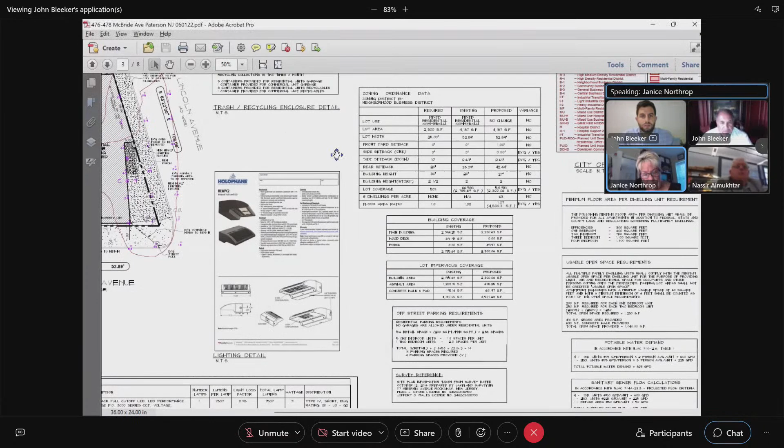May I ask you to post these plans? My son is available, Johnny can you do that? Yes, just give me one second. This way the board can see it. Can you guys see this? We can see it, except it's minuscule, so maybe enlarge it a little bit. This way people will understand what you are trying to achieve here. Are you able to see this section, does that help a bit? You enlarge it.

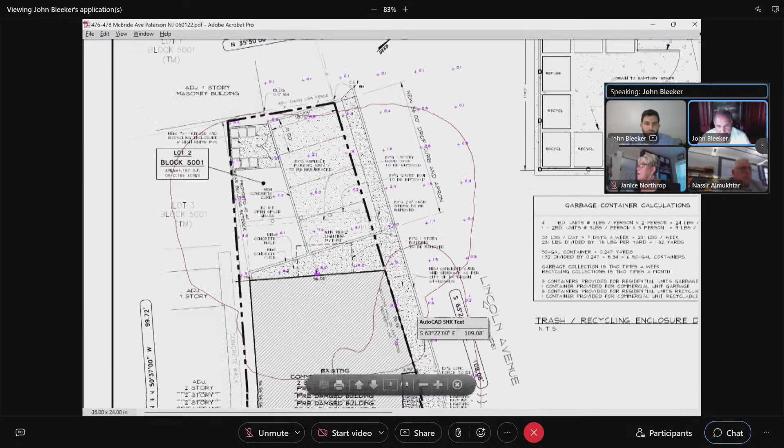There is obviously parking available on the street, since Lincoln Avenue is a dead-end street, and it only services, I think, just another 3 properties, which are restricted in use. So there is very available parking on Lincoln Avenue after hours, besides the parking that we're providing within the property itself.

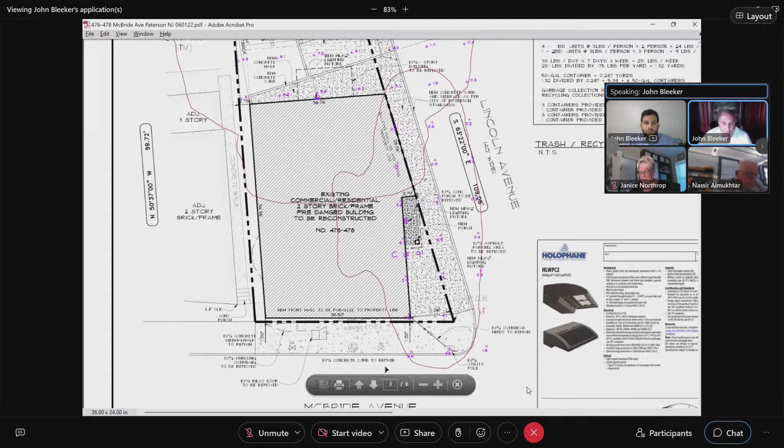If you look at the shaded area, it shows the existing building configuration as it is now. The only real significant change is what we indicated before: we're moving the front wall and reconstructing it back 1 foot. The purpose is structural and aesthetic reasons, because now we can redesign that front wall. But more importantly, we're eliminating the overhang encroachment that was there before onto the county right-of-way. That will no longer be a condition if this application is approved.

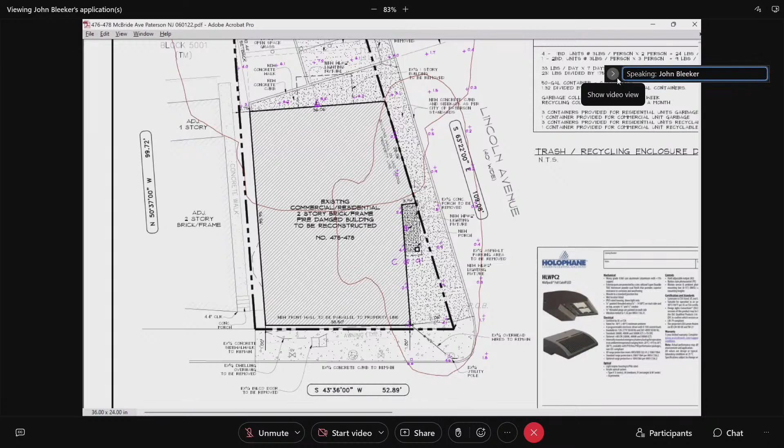Can we go to the next sheet, please? On to the next pages, I guess.

This drawing shows the drainage plan. What we're doing is taking the roof leader drainage from the existing building, piping it to seepage pits at the very rear, underneath the new parking area. That will allow us to capture the rainwater and recharge it back into the soil without causing additional drainage.

There was no real drainage facilities on the property when we went to do our visit. But we are now making a situation that didn't have any drainage into one where we're capturing the drainage from the entire property and recharging it back into the soil naturally. That's a much significant improvement to the property if the project is considered for approval.

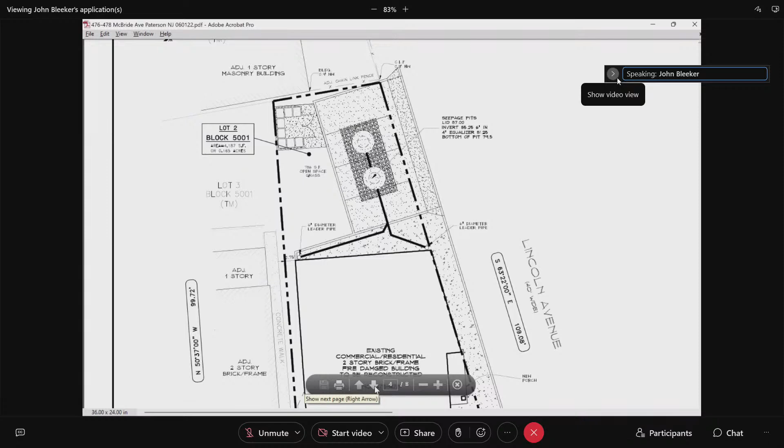Next sheet, please. This is just a soil erosion plan, necessary during the construction process. These are all the construction details on the next sheet that was just shown on the screen.

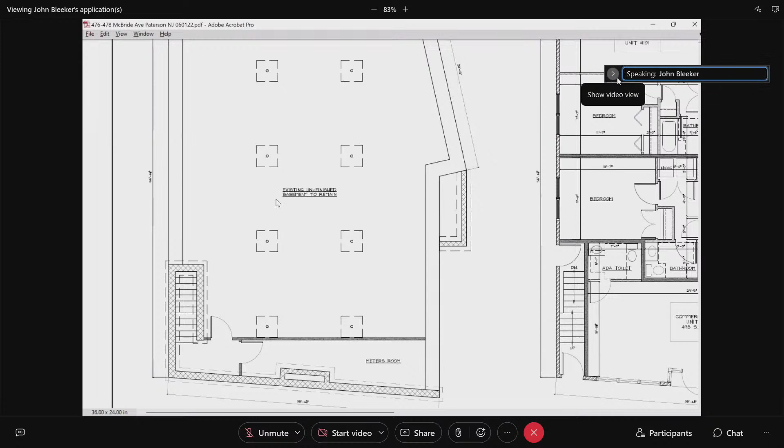Now we are at the floor plans - the existing basement floor plan is all the way to the left side of the sheet. The white areas show the existing foundation walls. If you see an area that has 2 lines in white in between, that's the existing foundation wall to remain. Anything hatched would actually be new walls that are going to be constructed.

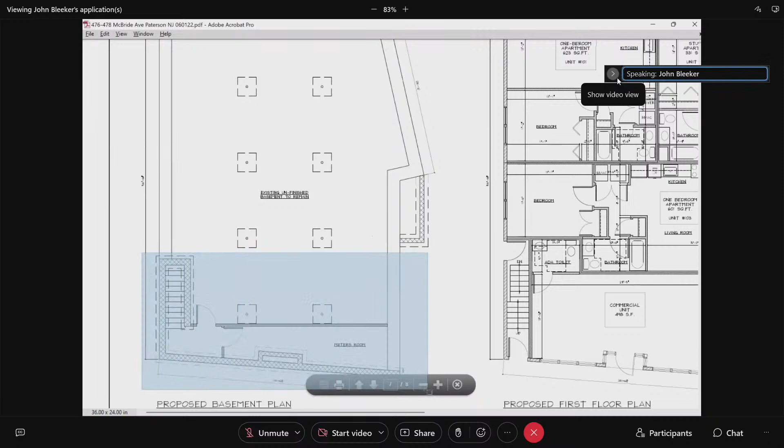Primarily you see the whole front wall, which is the same wall as the front of the building on McBride Avenue - that will all be new, as well as the wall around this new staircase that would go down. So the basement was existing; we're not doing anything additional to it. There is an area for mechanicals, for the electric meters and gas meters, that's going to stay in the front area of the basement, and the rest of the basement's going to be just open.

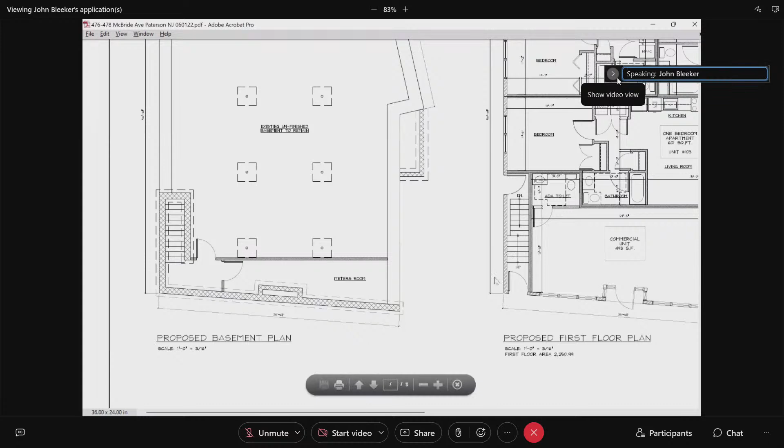The next plan is the middle of the sheet, which is the first floor plan. It shows the very front area, which is going to be the commercial space, which is significantly reduced. Originally, that commercial, the bar area and the commercial restaurant went all the way front to back of the building and occupied the whole first floor.

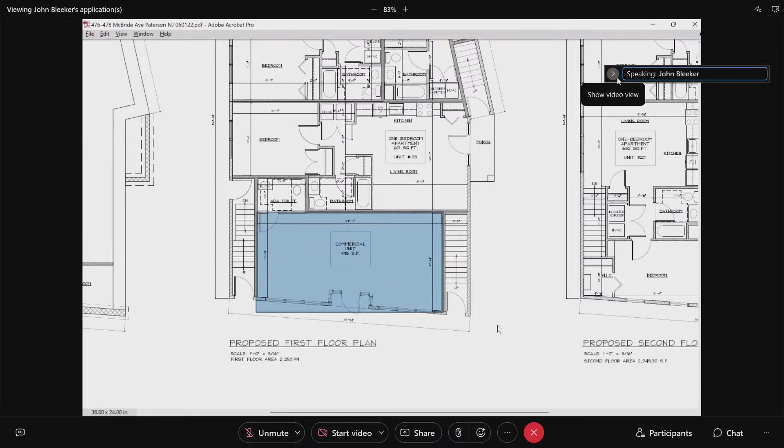Now we're only asking the board's consideration for about 490 square feet of commercial space. And then we are asking for 3 residential units, which would be contained behind that space. Each one of those units will be fully upgraded to current housing standards, including ADA access, because all those units would be at grade. So the bathroom facility would be large enough for handicap adaptable.

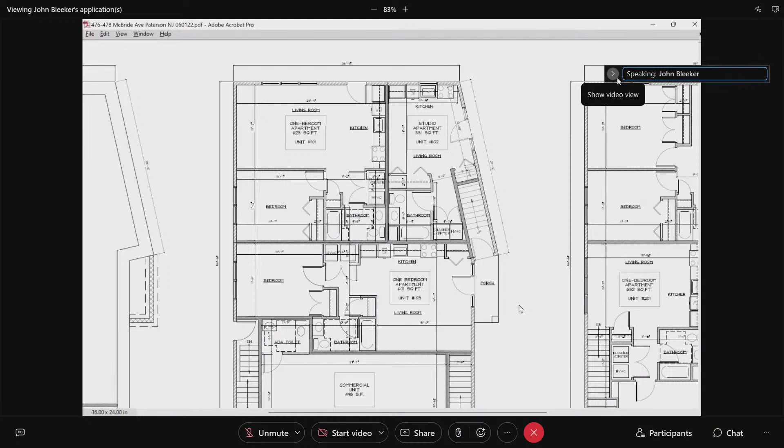The last plan is just the second floor plan, and that's on the right side of the sheet. And that shows the additional units that we're proposing within the confines of the existing building. And we are providing four units that will be located on the floor.

But I want to point out that we were able to design these so that each one of these units has a separate entrance that would actually go down right to grade. Number one, making it a much safer arrangement, but also a more private situation than having a common hallway and the units coming off of those. Each one of these units would actually be something that we're not always able to provide in projects of this type, but we were able to do that for this project.

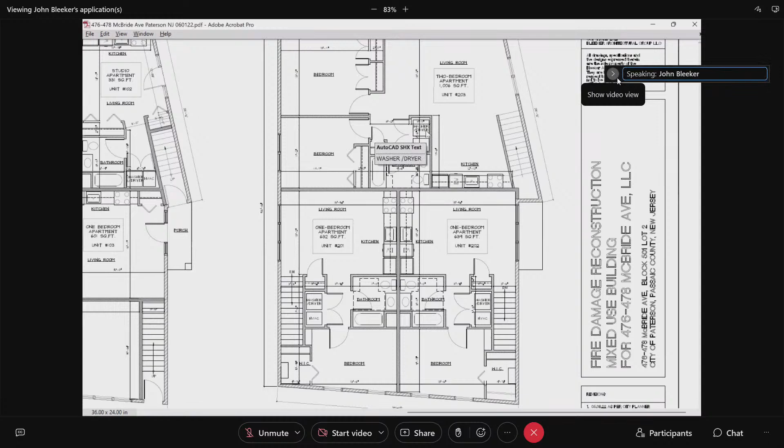I think that pretty much concludes my testimony describing the building, Mr. Americano. I don't know if there's anything else you want to add. Mr. Bleeker, can you show the outside of the building?

I have it on plans. Here we go. Yes, here we go now. That's it. Thank you. John, you could just give us a brief description of the exterior design concept you have? Yes, I'd be glad to.

As you can see, the drawing you're seeing, the proposed front elevation, which is on the left side of the sheet, is going to be the new front wall. The roof was significantly damaged as well as that front wall. So we are going to be replacing the roof, which was originally a slight pitch to it. We're going to give it more of a steeper pitch so we can use conventional fiberglass lifetime shingles.

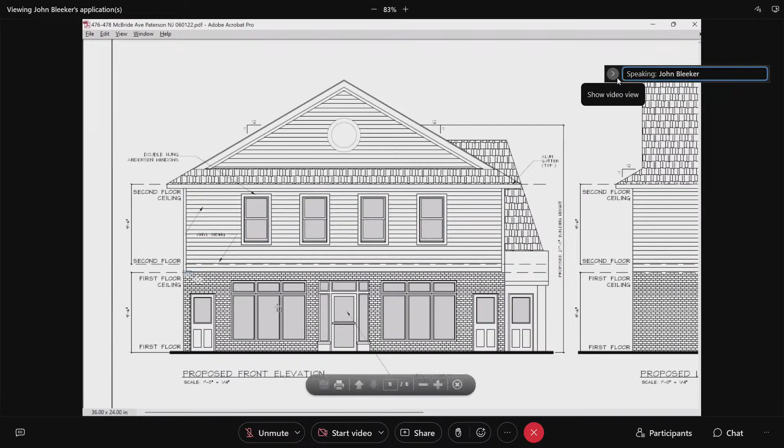And that's going to have vinyl siding on the upper area, which will be the new vinyl siding, which is actually quite nice, and it has an impression to give it a very good wood look. Then the bottom would be a brick veneer first floor facade with significant windows and an entrance in the center, basically a storefront for a commercial use.

The commercial use that we are contemplating but have not decided because we haven't advertised it yet, since we don't have approval, but we are going to be contemplating any type of use that is permitted within the B1 zone. Obviously, we're not entertaining a bar or restaurant or anything like that at this time. And of course that's a very limited amount of square footage, so the nature of the business has to be small service, correct? Small service, neighborhood service type business, absolutely.

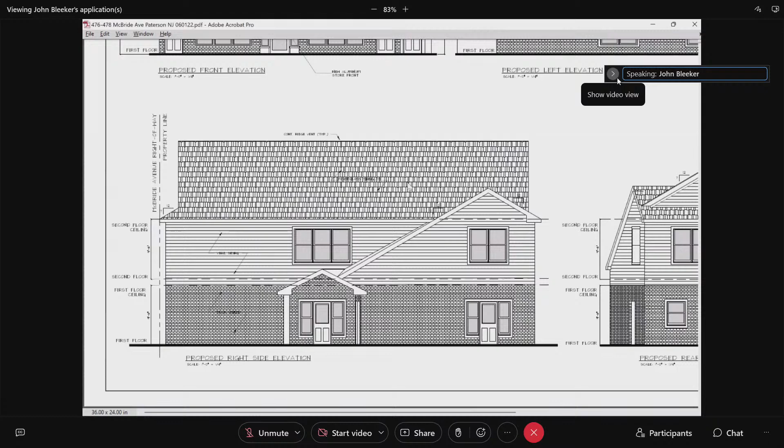John, your exterior plan also shows lighting and security as well? Absolutely, yeah. We have lighting throughout the front as well as the side facades and the rear, and we are providing security cameras throughout. The building also is going to be fully sprinkled where it's not now, not only because we suffered fire damage, but it's also going to be required by code for this particular structure with the mixed use component.

Now this, as you indicated and as our staff indicated, is a permitted use. In terms of the streetscape of McBride Avenue, just from a planning perspective, does it fit in your opinion with the surrounding area? Well, I do, because if everybody's familiar with this area, you do have some commercial uses, but you do have residential uses as well along McBride Avenue.

This is actually a nice area of McBride Avenue. It's very close to the Squirrelwood Road entrance onto Route 80. So it's actually a fairly heavily traveled area and does see a lot of vehicular traffic. So we felt it was important to give it some commercial presence on the first floor with the facade design, but also have some reference to residential presence, which is predominant in the area.

Obviously, the building is only 2.5 stories tall, which is going to stay, and that is the primary size of the residential structures in the area. So I do believe this blends actually very, very nicely and very well, but does serve the purpose of the uses that we're proposing.

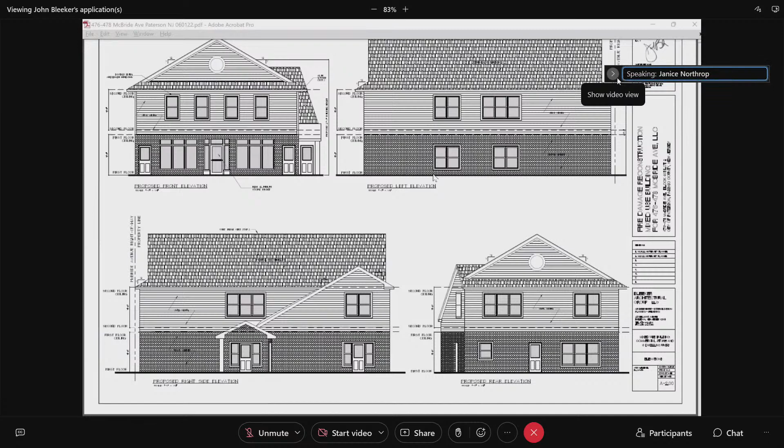So you can take your plans down for now. Thank you. And commissioners, any questions of Mr. Bleeker on this application? Commissioners? Okay, I have a question.

I'm not concerned, I just have a question as to where the refuse would be. Like when they pick up, if you had a commercial area downstairs, even though it may not be a restaurant or anything, certainly not a bar, but a service business, they're still going to have, whether it be papers, refuse that has to be discarded. Where will that be done? Where is that refuse going to be held?

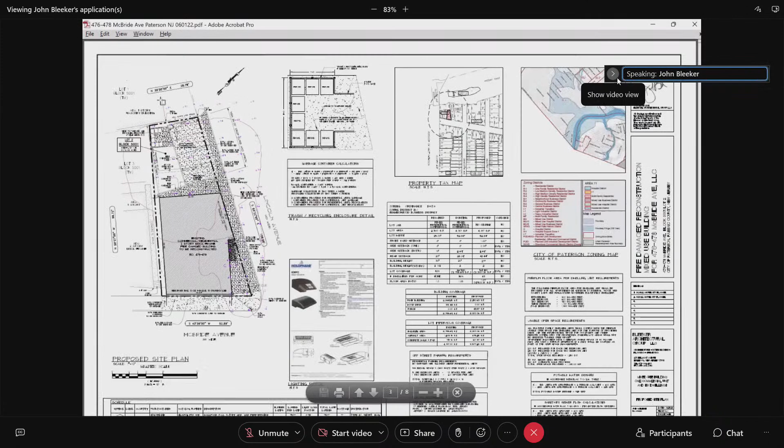Did I miss something? Madam Chair, no, I probably didn't mention it in my testimony, but it is shown on the site plan, at the very rear of the property. And it's in the corner, and that area is not only for refuse, but also recyclables. And that's all going to be stored within a fenced-in enclosure at the very back of that property.

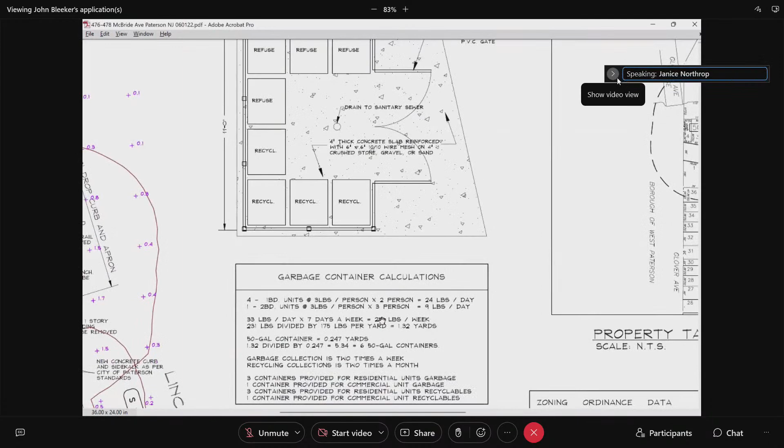All right, awesome. So I just want to know also, now I know you mentioned this, I'm just going to reiterate, you have video cameras that will be positioned on this building? Yes, we're going to have video cameras in all the common areas as well as the exterior of the building, and the parking area as well.

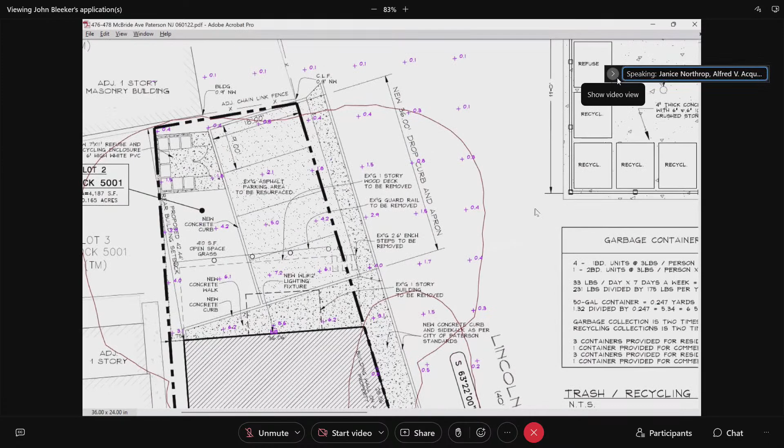Okay, I'm going to go back. Commissioners, any commissioners? Madam Chair, I actually have a question. Wait, you can take the plans down for now again. I'm sorry, Commissioner Figueroa, you have a question? Yes, well, it's not so much a question.

I just wanted to ask a little bit about the seepage pits. And by the way, I really do appreciate all of the updates as far as the ADA compliance with the interior design and so forth. But I'm just a little concerned, because that is somewhat of a flood zone.

And I was just wondering how that works, if the water is collected through the seepage pits and integrated through. If you could just explain that a little bit. I'd be glad to, Commissioner.

Basically, if we were building a brand-new building, the requirement today is that if the property was vacant, a soil lot, the rainwater could actually get absorbed directly into the soil. When you build a structure and parking, the area becomes totally impervious and the water can't get into the soil any longer. So we're required to trap that water and pipe it underground into a recharge pit that allows it to seep back into the soil naturally, and we calculate that it goes at the same rate.

In this case, because it's completely impervious now with an existing building and existing paved areas, we're not actually required to do that, but my client has opted to do it to make it a better arrangement and a safer situation. So we are piping all the existing roof area back underground into these seepage pits, which are nothing more than a 6-foot diameter porous wall container that goes down about 3 to 4 feet, with a stone bed around it that allows the soil to slowly absorb the rainwater.

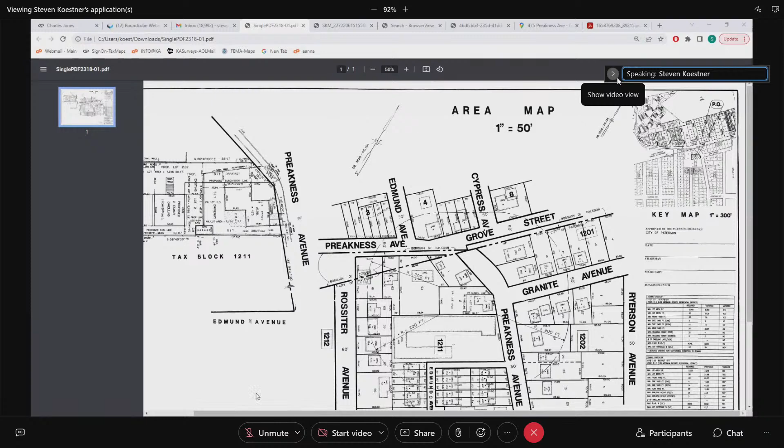To start, this is the minor subdivision plan, as your planner has stated, last dated March 23rd, 2022. This is the area map in the center of the page, and the subdivision plan is in the upper left-hand corner. Let me figure out how to enlarge that. I'm more familiar with the zoom. Here we go.

Preakness Avenue, where my arrow is, runs along the northeasterly side of the property. The present dwelling, a two-story aluminum type dwelling built in the 1960s, as the planner described, is known as 475 Preakness Avenue. The lot encompassing the larger box, the proposed new lines along the arrow, is 75.6 feet in length, then runs down 47 feet, goes around the existing garage, and runs along the original property line on the southeasterly side. That lot area is 4,780 square feet.

A variance is being requested for that lot, as 5,000 square feet is required. We're just a very small square footage short. Yes, a couple hundred square feet short, correct.

The larger lot, known as lot 2.02 on my plan, is 7,246 square feet, so that lot is oversized. However, a variance is requested for the frontage, being 29 feet, which is adequate for ingress and egress, with the bulk of that lot in the back of the property. As I said, that conforms in lot area, but it does require the variance for the lot width.

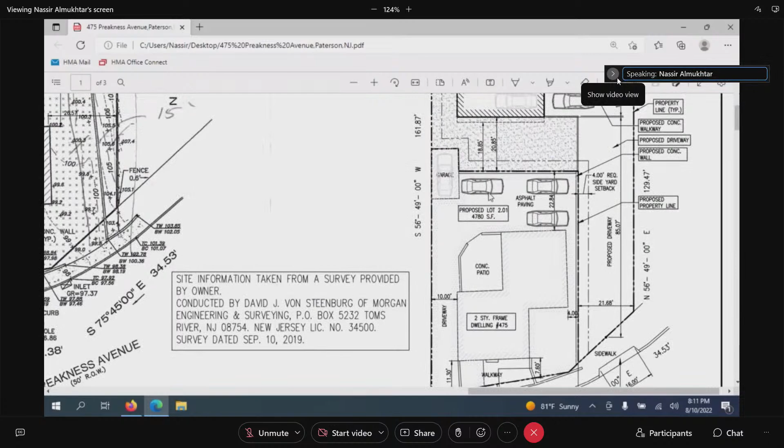Good, okay, I'm going to zoom into the proposed site plan. So this is the proposed site plan. This access was the existing driveway, which would provide access to the existing dwelling parking. There's a detached garage to remain, and then 3 parking spaces towards the rear. This is the proposed dwelling - it has some bulk variances. We do have parking in front of each dwelling, and parking in the garages at grade level also for each dwelling, so each dwelling will have 2 parking spaces independent of each other.

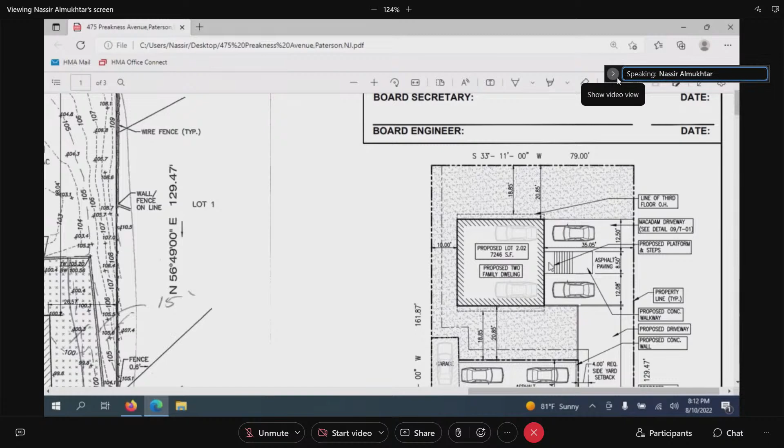Now this proposed lot is oversized also - it's 7,246 square feet, so it more than complies with the minimum requirement of 5,000 square feet.

The front facade is symmetrical on the right side, and on the left side, each one would contain the proposed dwelling unit. Each unit will have 3 floors. The grade floor would have the parking with the garage doors, and above that, windows for the living/dining room. We are proposing 2 separate entrances for each of the dwelling units. The upper level would have windows for the bedrooms, and we have 2 dormers to give it some aesthetic and make it more appealing visually.

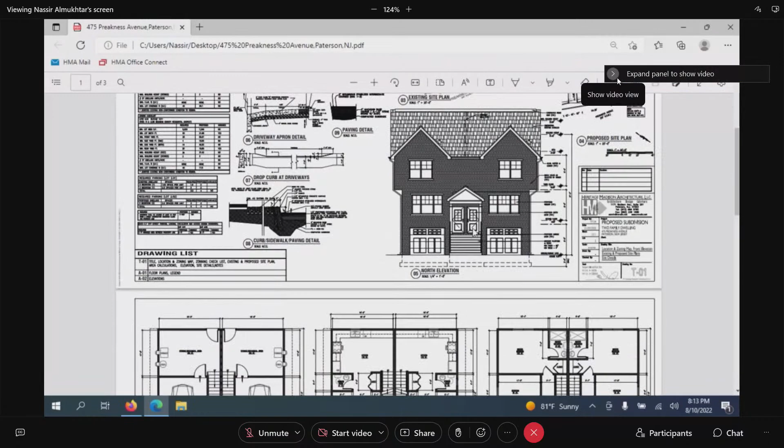Moving on to the next page, I'm going to zoom to the drawing on the left, which is the grade level. Each unit would be 16 by 34, 16 wide by 34. It would have a good size 1-car garage, and towards the back, a storage/mechanical room. Off of that space, we would have an independent staircase from each of the units to go up to the upper level.

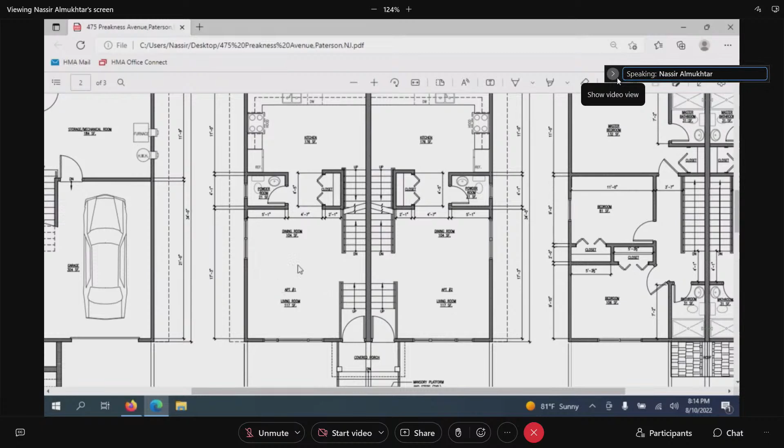There's a common staircase in the front of the proposed unit, leading to a covered porch with 2 separate doors. The floor plans are identical. At the entrance, you would have a living/dining room, open floor plan concept. Towards the rear, there's a good sized kitchen, which can be an eat-in kitchen. There's also a powder room and a closet. It has a staircase that goes down to the service area, and a staircase that goes up to the upper floor, which contains the bedrooms.

The upper floor would have 3 bedrooms. Towards the rear is the master suite, which would have its own master bathroom. There's another bathroom shared by the 2 bedrooms on each unit, so each unit will have 2.5 bathrooms. It would have its own utilities, and the closet can be used for washer dryers for each of the units. We can provide a washer hookup.

A condition that we could amend the plan to that effect? Okay. Yes, 100%.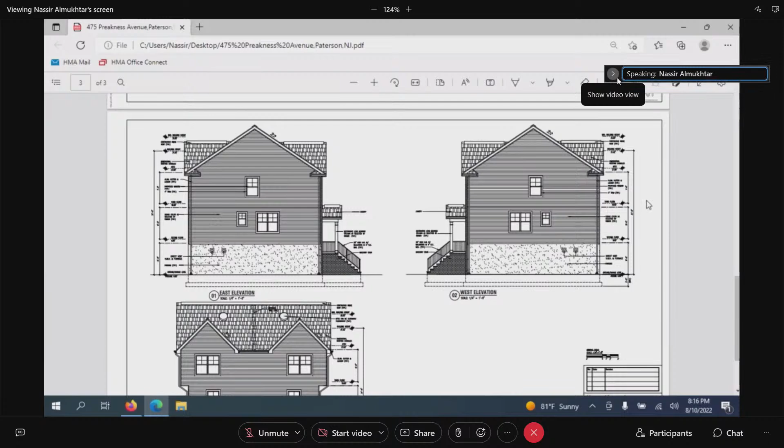The height is in compliance. We have 31, almost 31 and a half feet, which is lower than the maximum allowable, so we are in compliance in terms of the height of the structure. Also, the square footages for each of the dwelling units exceeds the minimum required, so it is in compliance in terms of square footages.

I believe it's a better layout than a floor by floor apartment. It's kind of a duplex. You feel that you're living almost in a single family home with one wall attached. We can provide the sound insulation and what have you, but it has an open floor plan concept. The sizes of the rooms are all very good sized, so I think it would provide a very good living environment in those dwelling units.

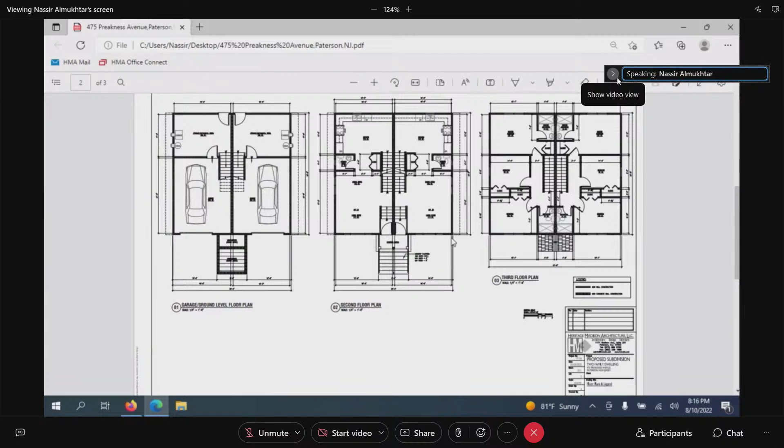So that's basically my testimony, obviously subject to any questions. Okay, so that would conclude our direct testimony, Madam Chair. At this time, we're available.

Okay, I'm going to open this up. Madam Chair, if I could just ask one question. Mr. Maricano, I just heard you say something about amending the plans, but I didn't catch what that involved.

Okay, we just mentioned that there's sufficient closet space within each of the new units to add a specific washer and dryer, which was not on our site plan. So that's something we definitely want to commit to do. All right, so you're going to add a washer and dryer in each unit? Yes, and they also mentioned possible soundproofing the walls.

Possible what, Madam Chair? I'm sorry? I thought I heard them say soundproofing the walls between the two units. Did I not hear that? Yes, Madam Chair, that's a definite. It's not possible - we'll definitely provide that.

Okay. All right, so is that it, Mr. Acquaviva? Is that it? Okay. Yes, then I'm going to open it.

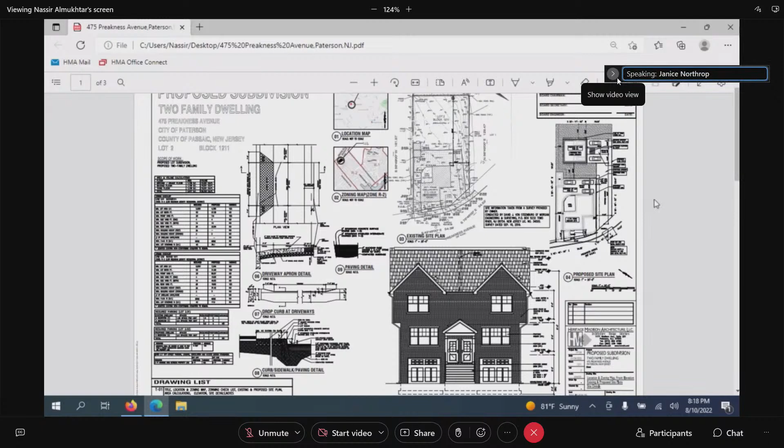I'm noticing that you're only looking for two variances on the subdivision and two variances on the site plan. Am I correct? Yes, that's correct, Madam Chair. Okay, that's good. So any questions from the commissioners?

I do, yes. Is that Commissioner Lorenzo? Yes, for Mr. Almukhtar. Yes sir, Almukhtar, yes. Okay, I'm sorry. No problem.

The front house is going to stay the same, right? That's correct. So there's no parking for that one? There is parking, so there's no parking variance, there is sufficient parking. Each new dwelling will have 4 parking spaces, Commissioner. I believe Mr. Lorenzo is asking about the existing building. Each, the existing and new, will have 4 spaces. Okay, that was my concern.

Commissioner, we're good? I can't hear you. Commissioner Lorenzo, are you okay with this? Okay good, I see the head bobbing.

Do we have any callers, Madam Secretary? No. All right, so if there's no more questions, I'm going to make a motion to close the public portion. Who would like to make the motion? I make the motion to close the public portion. Commissioner Lorenzo. Do I have a second? Second, by Commissioner Roman. All right, that's the public portion.

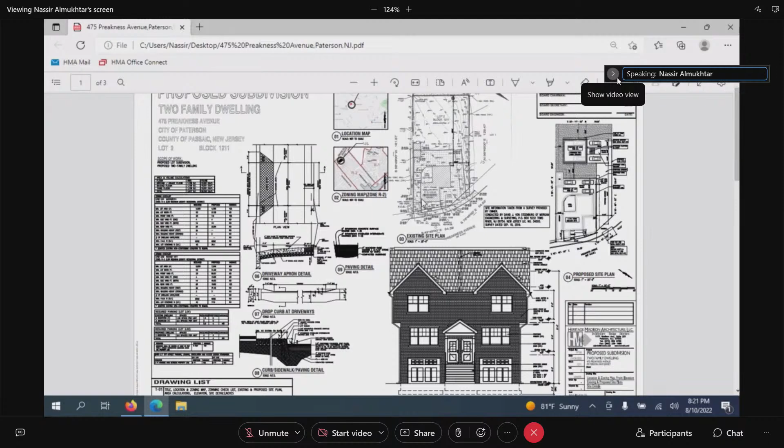I only heard one condition because one was already described, that there will be soundproofing. I believe the only condition would be that the closet will be made available for a hookup of washer dryer. Am I correct? Yes. Madam Chair, if we can just have the plans taken down? Yes, please take the plans down.

Yes, one second. He's working on it, I'm sorry. Okay, got it.

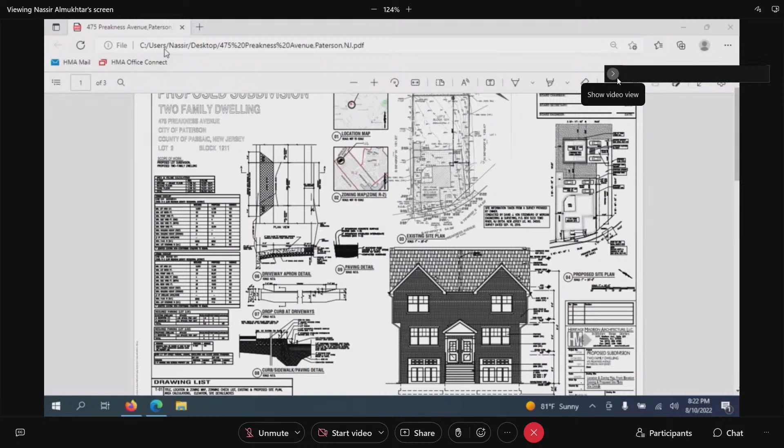Okay, good. All right, so I would like to get a motion on the subdivision first. This is a two-part thing. Would anyone like to make the motion on the subdivision part only?

Yeah, just for clarification, Madam Chair, the conditions are not part of the subdivision. The condition would be part of the site plan and bulk variance, correct. Okay, so do I have a motion for the subdivision?

A motion for the subdivision? Sorry, I'm losing my mind here tonight. Okay. Anybody? Commissioner Figueroa. Okay, thank you.

I'd like to enter a motion to approve the application. Hold on, I need my reading glasses. I swear I don't have them, I'm sorry. All right, good, I do apologize for that. 66 Montclair LLC, 495 Lexington Avenue in Clifton.

Is that the right subdivision lot in question? Yes, the applicant proposes to subdivide the existing 12,026 square foot parcel into two lots. Exactly. I move that the board attorney prepare a resolution granting minor subdivision approval.